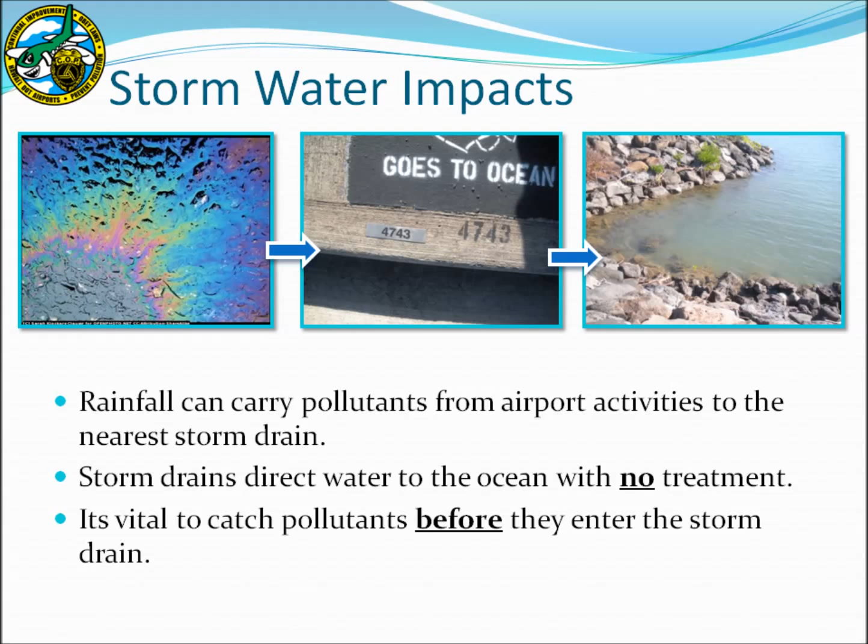All drainage systems eventually discharge to the ocean without any treatment. Therefore, it is vital to control potential pollutants before they enter the storm drain system and end up in our streams and oceans.

These structural BMPs are a requirement of the airport post-construction program, and more information may be obtained from the Hawaii Stormwater Management Program Plan, or SWMPP, Section D.

The second type of BMPs are operational or procedural practices. These are actions that may be implemented to reduce the potential for pollutants to impact the stormwater runoff. Examples of these BMPs include picking up trash, storing products indoors, or inspecting vehicles for leaks. These operational BMPs will be the focus of today's training.

There are many different BMPs that have been developed by the Environmental Protection Agency and other agencies. Therefore, each facility should implement BMPs that are specific to their particular activities.

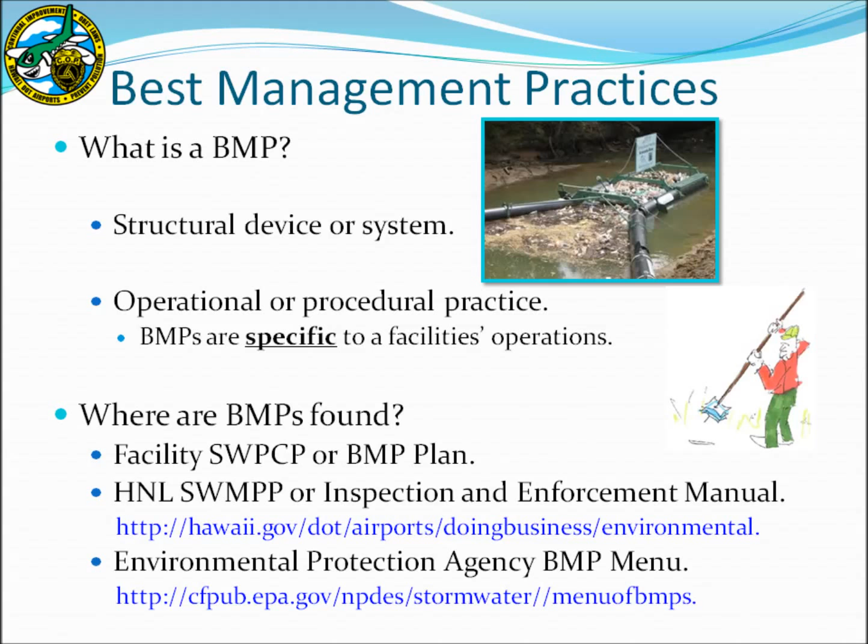At the Honolulu International Airport, tenants have been provided with specific BMPs in their Stormwater Pollution Control Plans, or SWPCP, or BMP plans. Lihue, Kahului, and Molokai airports have been provided with an airport-wide SWPCP, which is available at the website listed. For all airports, DOTA Environmental Health Specialists will evaluate facilities based on BMPs found in the Inspection and Enforcement Manual.

The first thing to do when selecting BMPs is to consider activities at your facility that may affect the stormwater runoff. The BMPs applicable to airport activities generally fall into the categories listed. Examples of both satisfactory and unsatisfactory BMPs are provided on the subsequent slides.

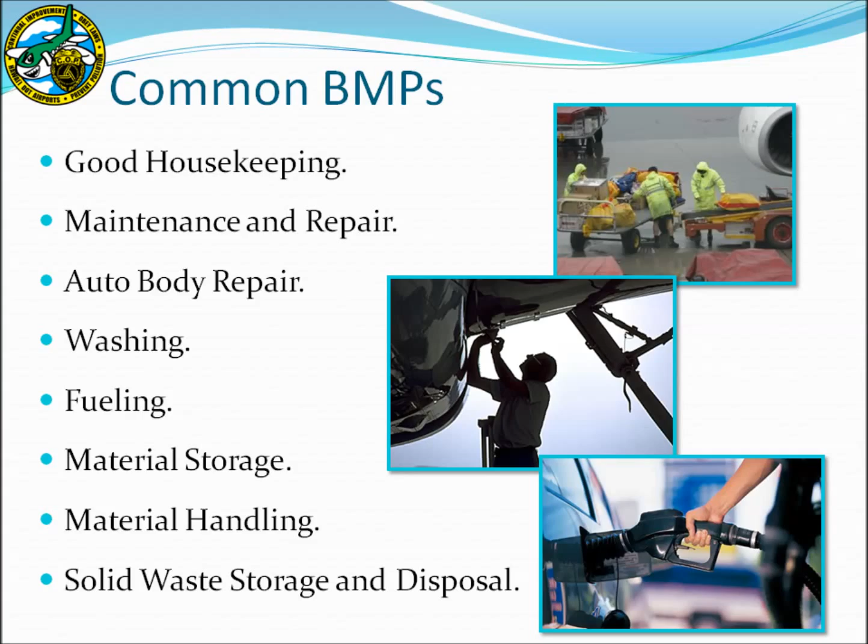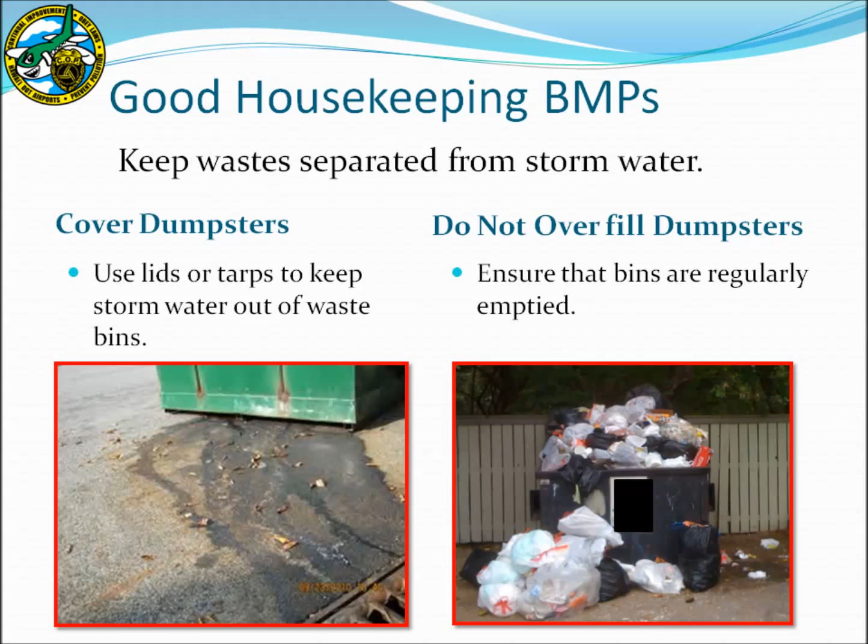The applicable BMP that should have been implemented is to store waste away from storm drains and to keep waste bins covered. The photo on the right shows a bin that has been overfilled, which has prevented the bin cover from closing. Trash and other debris left outside of the bin and uncovered may impact the stormwater runoff. The applicable BMP would be to ensure that waste bins are regularly emptied and prevent dumpsters from being overfilled.

Ensure that you are aware of the location of storm drain inlets or waterways near your facility so that they can be protected from facility activities. Those areas should also be included in regular facility cleanups.

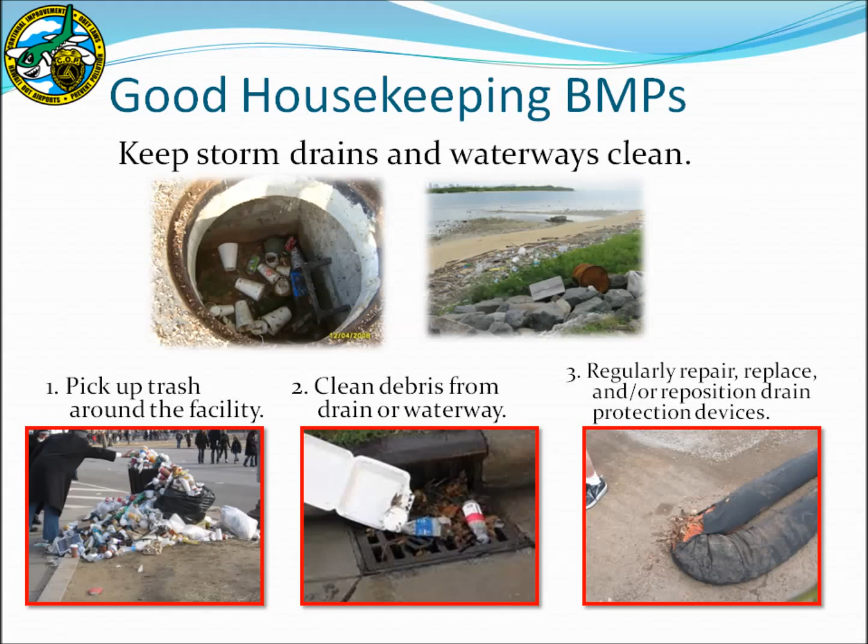Additionally, if storm drains are particularly close to facility operations, such as maintenance areas, you may consider installing a treatment device BMP, such as the berm pictured under item number 3. However, if these devices are utilized, ensure that they are properly maintained. BMPs that are not maintained can themselves become pollutants in the stormwater runoff.

As a part of the regular facility cleanup mentioned in the last slide, sediment and other debris should be removed using a broom or a vacuum. The fine sediment especially can be easily carried away in the stormwater and present a hazard to Hawaii's coral reefs. Ensure that a water hose is not used when cleaning a facility, as washwaters may also impact the receiving waters.

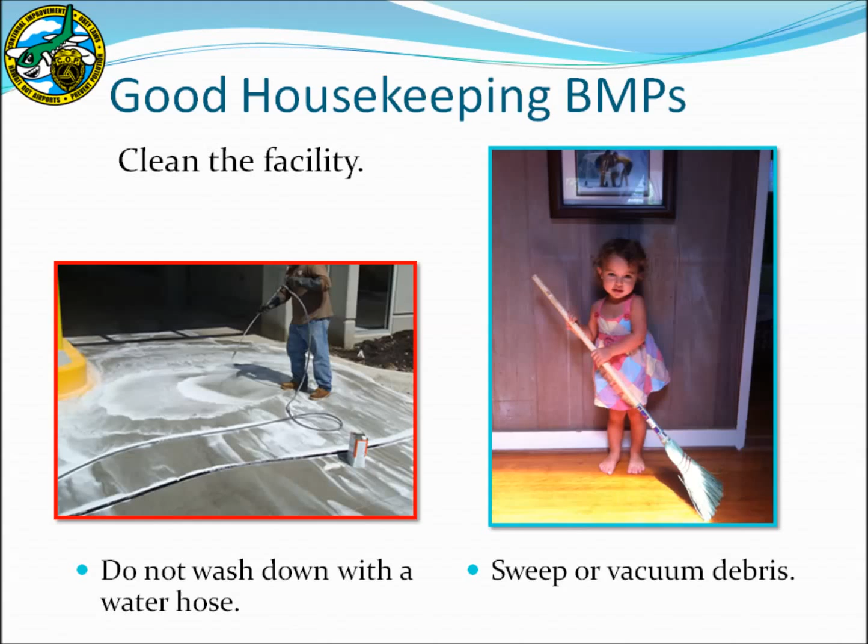Good housekeeping BMPs are varied depending on facility activities, so be proactive and consider how you can protect the stormwater. Consider using drain covers or other protective devices during activities. Contact DOTA if you notice that storm drains are filling with debris for cleaning.

Ensure that your workers are knowledgeable of facility BMPs. They will be asked during inspections whether they have had training and which BMPs they are responsible for implementing. Also, conduct your own inspections of BMPs to ensure that they are effective before an illicit discharge occurs.

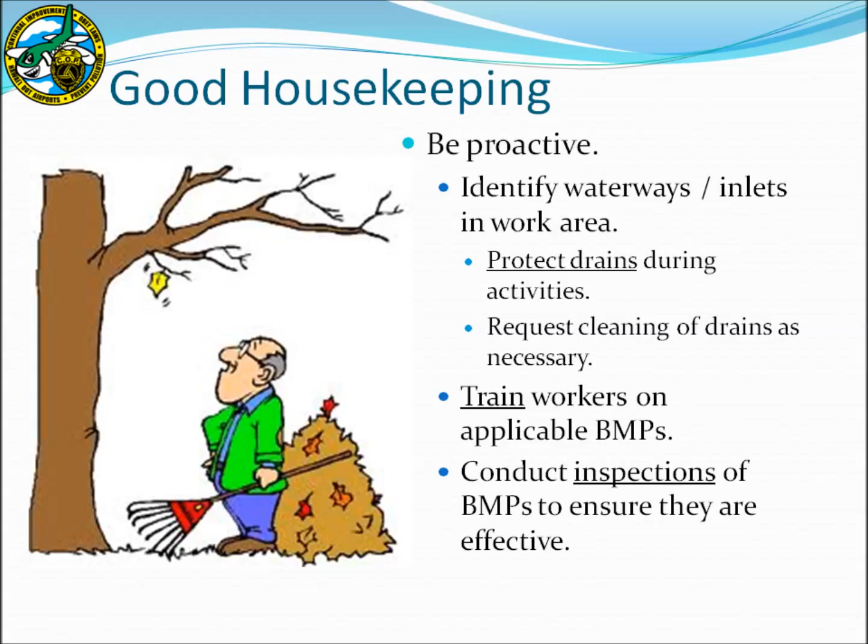The next category of BMPs are for vehicle, equipment, and aircraft washing. Washing activities should be conducted in a designated wash rack area if one is available. Wash racks are typically designed to contain the wash water and direct it towards an oil-water separator where it is treated prior to discharge in the sanitary sewer.

When washing, attempt to use as little water as possible to accomplish the task and ensure that it is contained within the system. Any wash water that is not contained in the wash rack may be discharged into the storm drain system. Often, discharges occur when wet vehicles and equipment leave the contained washing area.

Allow the equipment to dry as much as possible in the wash rack prior to exiting, and locate wash racks away from the storm drains to prevent these discharges. Also, consider the detergent being used, as some may not be compatible with the oil-water separator.

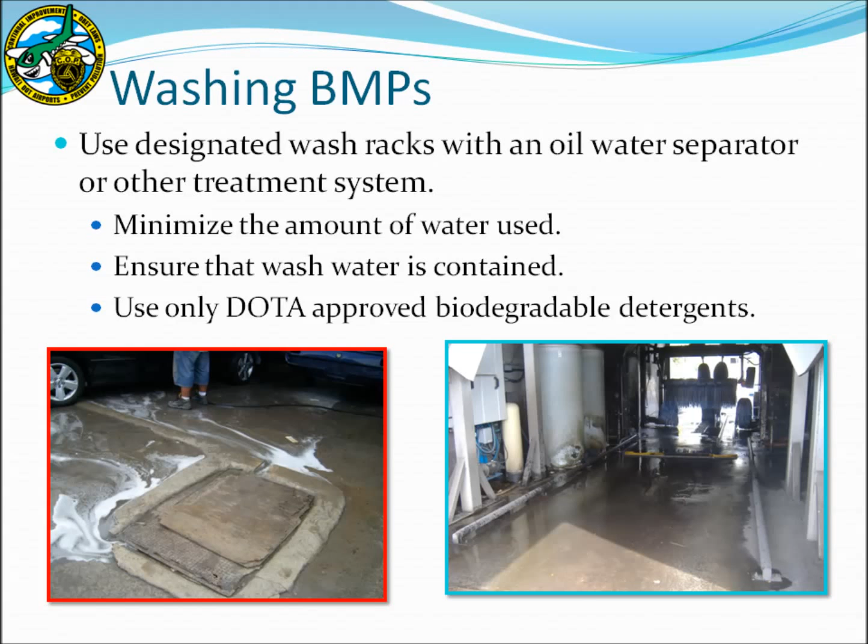In areas where a designated wash rack is not available, there are several alternative BMPs that can be applied. The goal of these alternative BMPs is to prevent the wash water with its potential pollutants of soap, dirt, metals, and oils from entering the storm drain system. This can be effectively achieved by containing the wash water.

Dry washing using a chemical and a rag to wipe down equipment is another BMP to consider when washing is required. This method does not involve water, and therefore there is no risk of discharge to the storm drain system.

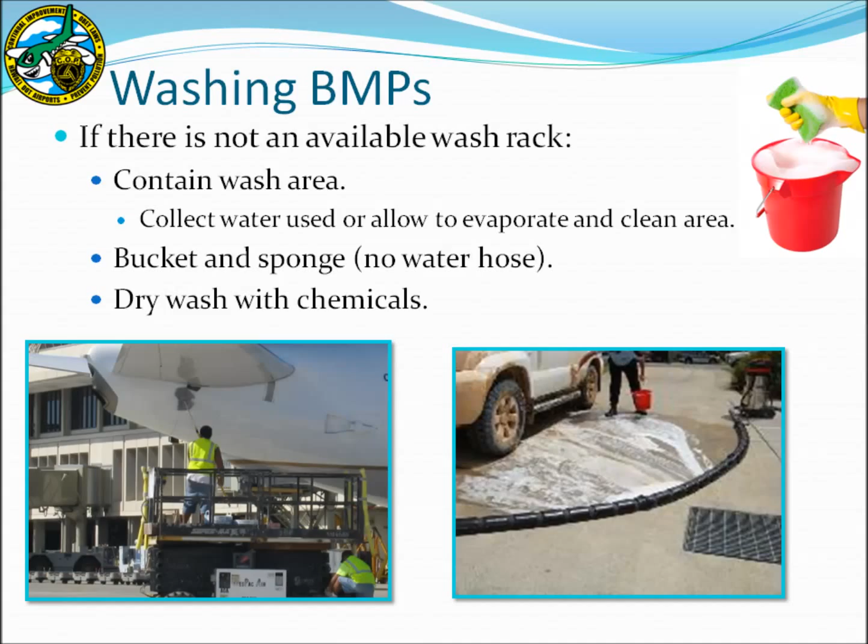Fueling BMPs consider regulations from the NPDES program as well as the Spill Prevention Control and Countermeasure, or SPCC program. For both programs, the airport's inspectors will be looking to ensure that adequate secondary containment has been provided for the fuel tank. The secondary containment may consist of a double-walled tank, a bermed area, or a polyethylene container. The containment must be sized to hold the contents of the largest tank, plus freeboard for rain if stored outdoors.

Operational BMPs that should be implemented include inspecting hoses and nozzles prior to use for any cracks where a release may occur, staying vigilant during filling operations so that any releases are readily identified and corrected, and ensuring that the tank is not topped off. Space should be left in the tank. When filling small or handheld equipment, ensure that secondary containment is provided for the operation.

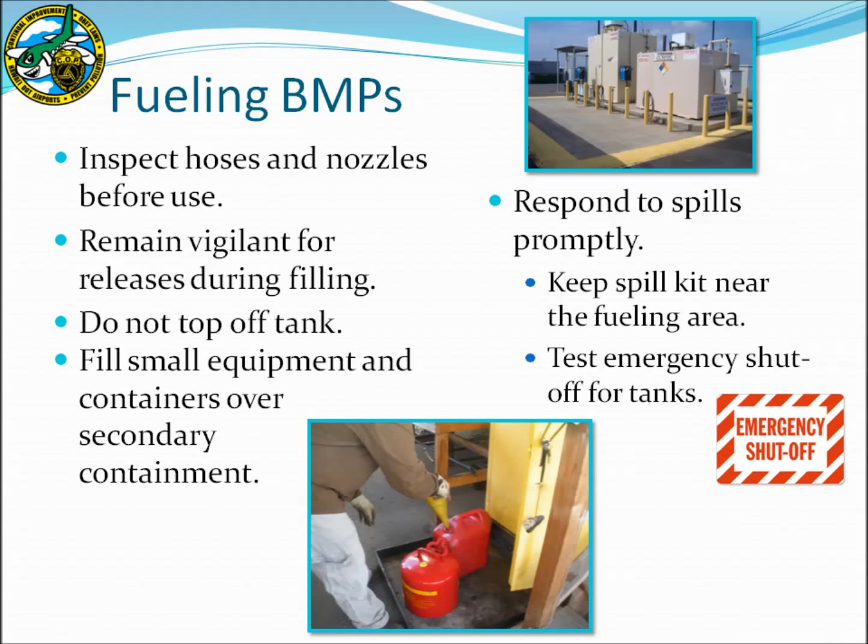Fuel trucks are regularly used at the airport for fueling aircraft. These trucks must have a spill kit on board, and personnel must be well versed in responding to spills that may occur from these activities. When not in use, these fuel trucks must be stored in secondary containment. The drive-in containment system pictured here is most often used to satisfy the secondary containment requirement.

This category of BMPs is specifically for auto body shops. There are many potential contaminants associated with auto body work, and therefore the first BMP is to ensure that these activities are conducted indoors or under cover so that these potential pollutants are not impacting stormwater runoff. This is the same reason that painting operations must be done inside a paint booth where potential pollutant discharges are contained. Often, vehicles that require auto body work may be damaged. Therefore, it is vital to inspect the vehicle and place drip pans to capture leaks until repairs are completed.

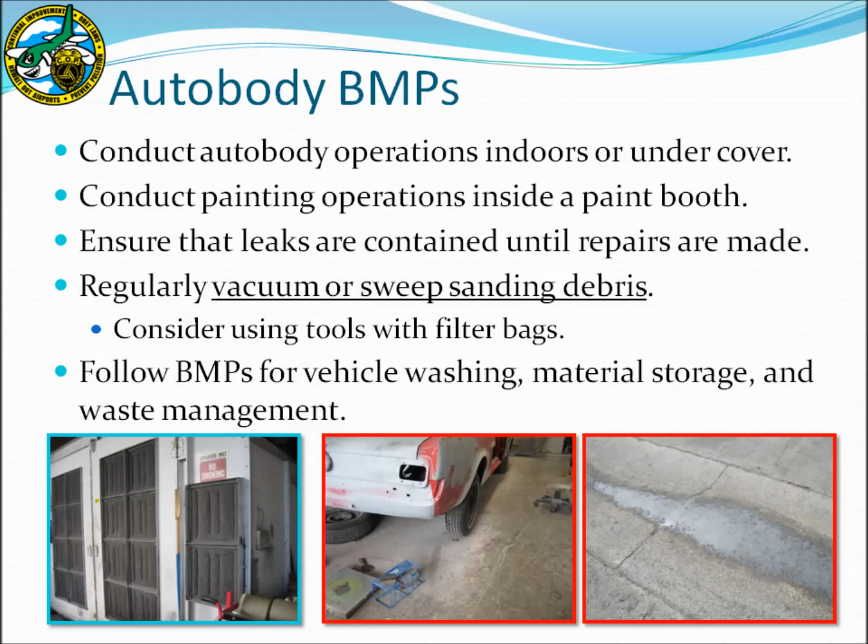A particular threat to stormwater from auto body work is the generation of dust from sanding operations. Due to its small size, the sanding dust is easily carried away during the next storm event. As noted in the pictures on the right, sanding debris can be tracked outdoors and end up in drainage ways that eventually lead to the ocean. Therefore, it is important that auto body shops regularly sweep and vacuum up the sanding dust. An additional BMP to consider is the implementation of tools that have filter bags to capture a larger portion of the dust before it is discharged. Auto body shops may also conduct vehicle washing, material storage, and waste management activities, which should adhere to the BMPs that are described in this presentation and/or their BMP plan.

These BMPs apply to the maintenance and repair of aircraft, vehicles, and equipment. It is important to keep equipment in good condition so that equipment fluids are not released to the environment. Conduct regular equipment inspections for leaks and repair as necessary. If a leak cannot be repaired immediately, use a drip pan of sufficient capacity to contain the leaking fluid. It is also important to ensure that the drip pan is regularly cleaned out. Please note that leaking aircraft, vehicles, and equipment are not allowed to be parked overnight on airport common use areas without appropriate drainage controls and prior approval from the airport's district manager.

Consider designating parking spots for vehicles at your facility so that oil stains on the ground are more easily linked to a particular vehicle. Additionally, ensure that maintenance records are kept so that patterns can be identified and equipment that regularly has releases can be decommissioned or replaced.

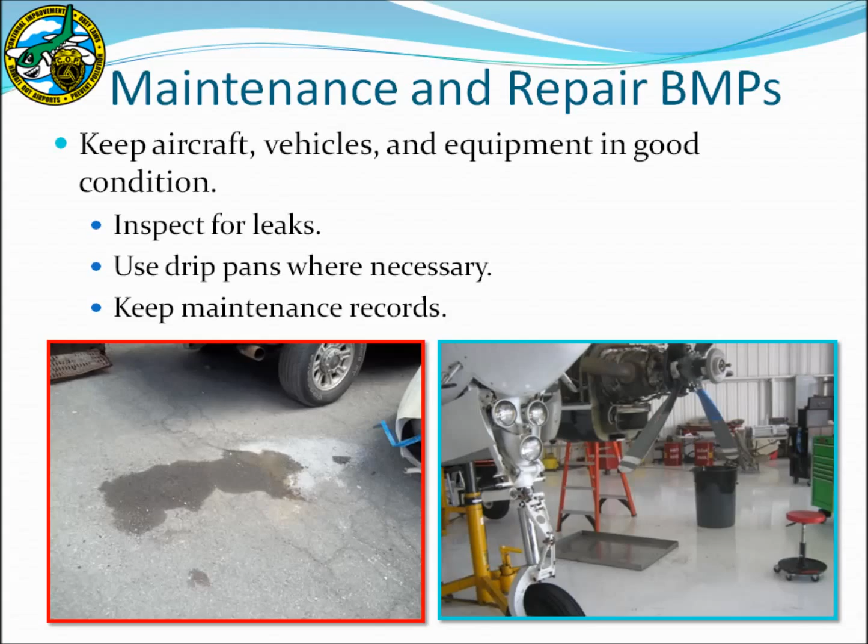Salvage equipment includes those items that are no longer working and are not planned to be repaired. When storing salvage equipment, ensure that proper BMPs are implemented. This includes removing fluids and batteries so that releases will not occur to the environment. Additionally, if vehicles or equipment begin to rust, they must be disposed of or placed in a covered area where the rust will not impact the stormwater runoff.

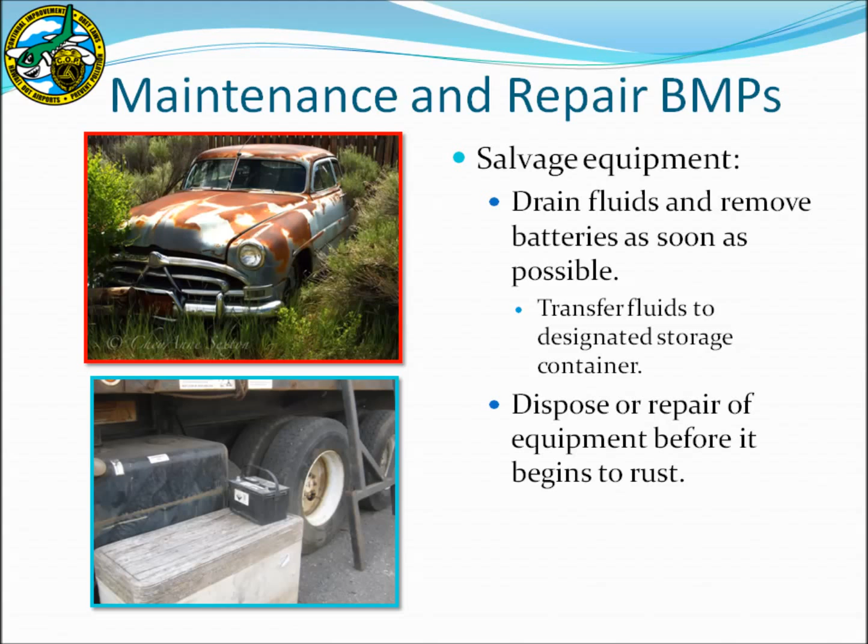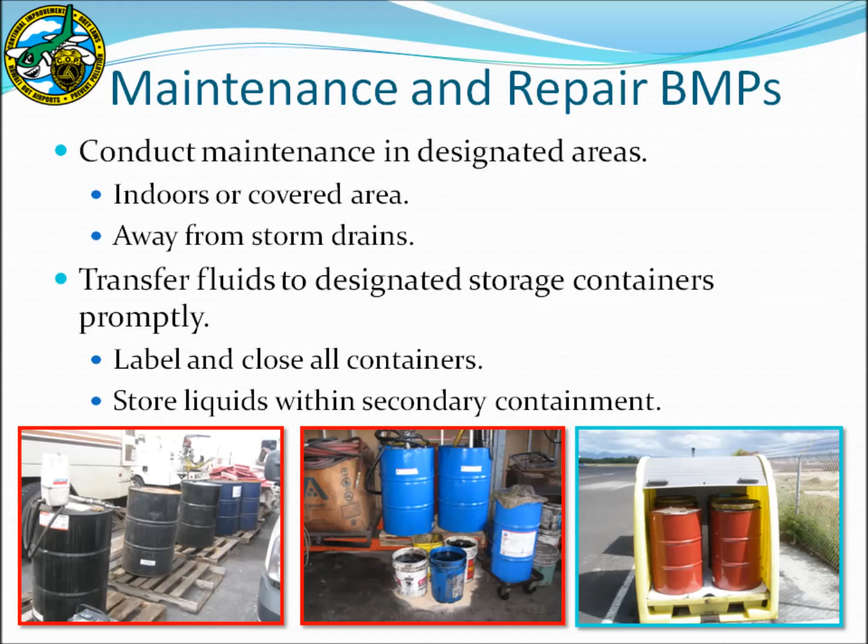Maintenance activities should be conducted indoors or under covered areas. Additionally, maintenance areas should be located away from storm drains so that responders have the opportunity to clean spills prior to reaching the drainage system. Also ensure that fluids removed from equipment are transferred to designated storage containers promptly. The storage containers must be labeled, closed, and placed within secondary containment.

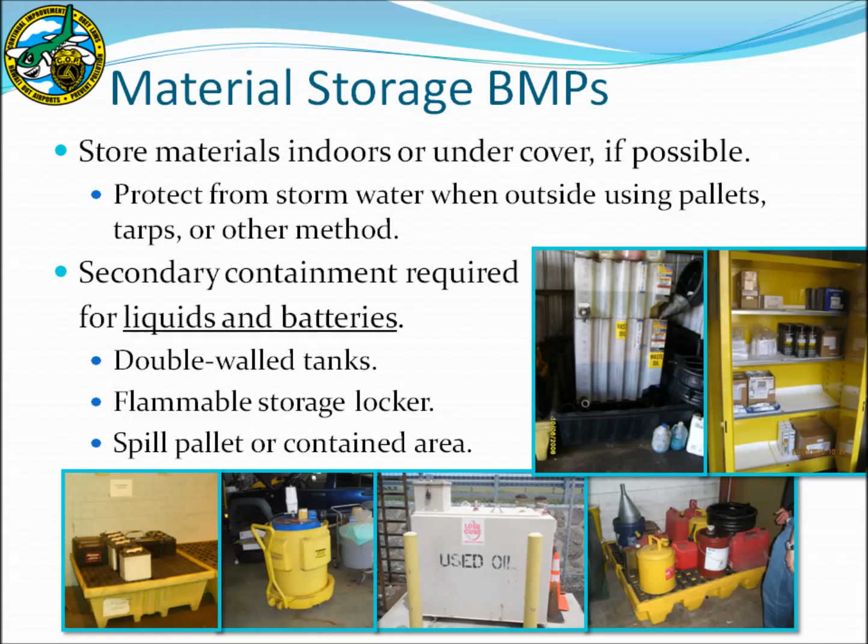The secondary containment must be large enough to hold all the contents of the largest container stored, as well as additional room for rainwater. Ensure that secondary containment is kept free of accumulated rainwater or product. Once the secondary containment device is filled, it can no longer contain additional releases from containers stored in that area. Rainwater may be discharged from the secondary containment provided that there are no contaminants present.

For example, if an oil drum is stored on a spill pallet outside, the stormwater in the spill pallet must not have a sheen. Then a designated person may empty the spill pallet onto the ground and record the discharge in their stormwater pollution control plan or other log.

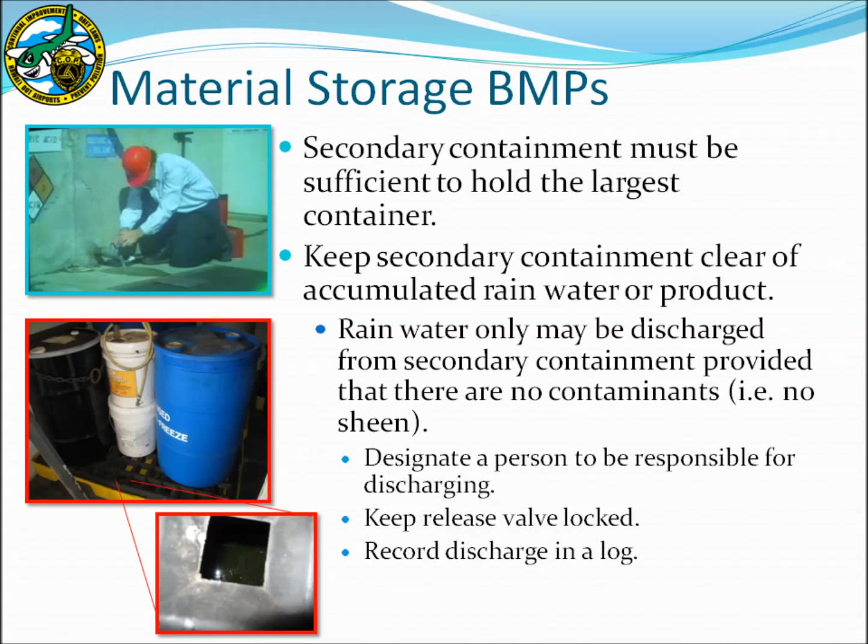For larger secondary containment that may be equipped with a discharge valve, it must be kept locked unless being utilized by the designated party. Please note that if product is present in the secondary containment, it must not be discharged. It should be cleaned according to the spill response procedures.

Other material storage BMPs include maintaining a list of chemicals at the facility along with the safety data sheets. Keeping an inventory will assist in preventing employees from over-purchasing items and also assist in ensuring that items are utilized prior to their expiration date. Both of these practices will reduce the generation of waste from material storage. Facilities should also consider alternatives for hazardous chemicals such as biodegradable solvents. Thus, if a release does occur to the environment, it will not cause such a significant impact.

It is also vital to conduct regular inspection of material storage areas. Ensure that containers are compatible with the materials stored and that they are still in good condition. Additionally, all chemical containers must be labeled. Even if the container is empty, then it must be labeled empty.

Aggregate material may also be stored at the facility, such as stockpiles of gravel or dirt. These aggregate materials may be carried away in the stormwater runoff, and therefore, appropriate BMPs include containing the stockpiles. There are many different types of containment, such as concrete walls, jersey barriers, silt fences, berms, or tarps.

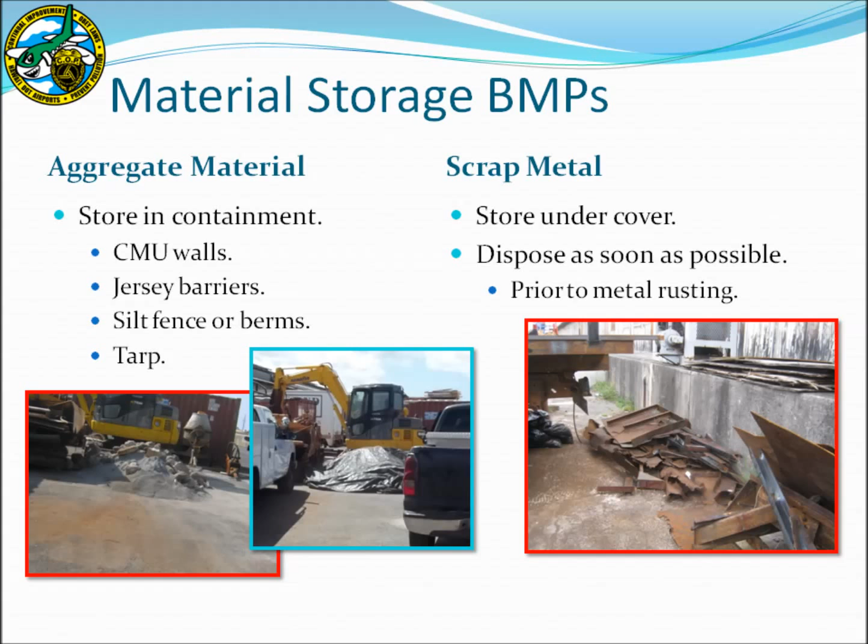Pesticides can include herbicides, such as Roundup, that are used to control weeds in the facility, as well as insecticides, such as Raid. These products are harmful if discharged to the storm drainage system, since they will also work to kill aquatic life. Therefore, applicable BMPs include storing pesticides and application equipment in secondary containment.

Also, applicators should check the weather conditions and ensure that pesticides are not used during high winds or prior to a rain event. When the pesticides are used, a log should be retained that includes the date of the application, the location where it was used, and the amount of pesticide that was applied. This log should be provided to the DOTA Environmental Section for their reporting requirements.

Additionally, the Department of Health has issued new regulations under HAR 11-55 regarding the use of pesticides. In general, these regulations will apply only if pesticides are used in or near a water body. Therefore, the DOTA has issued the rule that pesticides are not to be used within 6 feet of a water body. Please consult the DOTA Environmental Section with questions regarding this directive.

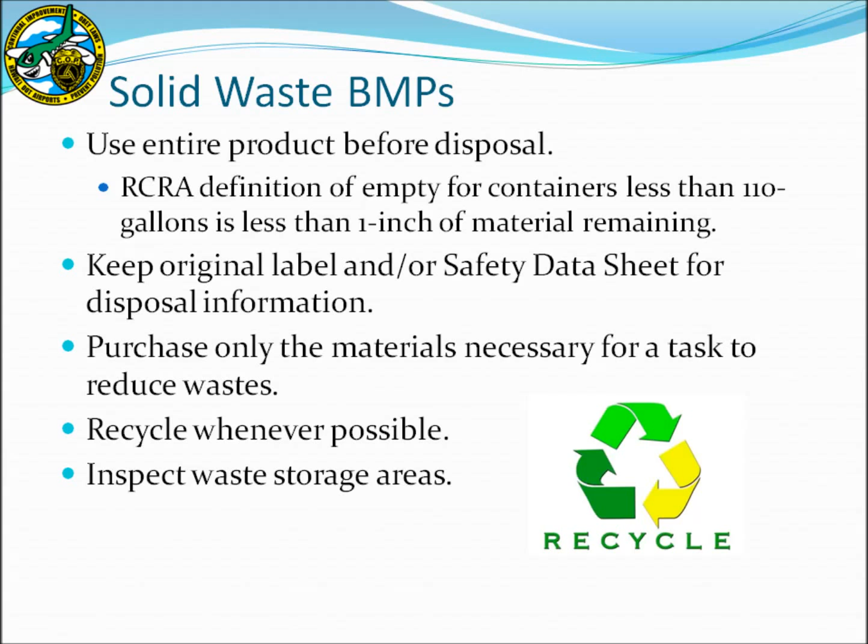Recycle items whenever it is possible, such as scrap metal and batteries. It is vital to inspect waste storage areas to look for releases and to ensure that waste containers are in good condition, closed, and properly labeled.

Many maintenance activities at the airport generate used oil. BMPs for used oil include storing it within a secondary containment device that is indoors or under cover. The used oil container should be structurally sound and properly labeled by removing all other markings and adding the words "used oil." Additionally, the container should be closed when not in use, such that if it were to tip over, the waste would not be spilled.

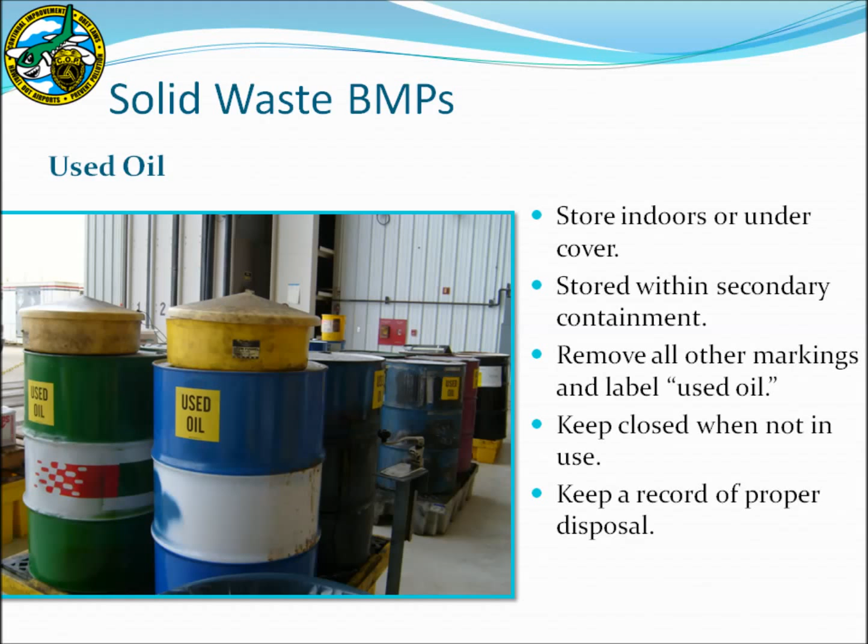When disposing of the used oil, ensure that a record of the disposal is retained. Airport inspectors may ask to view these records to ensure that wastes are managed appropriately.

Hazardous wastes are another waste category that is heavily regulated. You must first determine if the wastes generated at your facility are hazardous. Please refer to 40 CFR 261 for the definition of hazardous waste. If hazardous wastes are stored at your facility, ensure that the wastes are not mixed.

BMPs for storing hazardous waste include keeping them indoors or under cover, ensuring that they are within secondary containment if liquid, and labeling them properly with the words "hazardous waste" and the accumulation start date. Ensure that wastes are disposed within the appropriate timeframes depending on the facility generator size, and maintain the disposal manifest for 3 years. Airport inspectors may ask to see copies of these manifests to verify proper waste disposal.

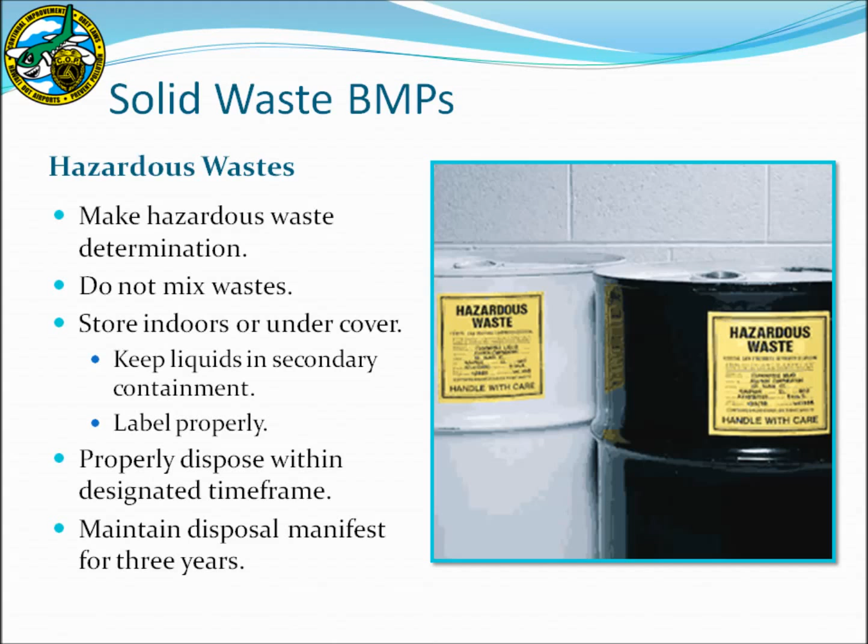Universal waste includes hazardous waste items such as lamps, batteries, bulk pesticides, and any mercury-containing equipment. If universal waste is stored at your facility, it must be placed in a structurally sound container and labeled with the words "universal waste" and the accumulation start date. These items must be recycled within 1 year and disposal documentation retained for airport inspectors. Please note that broken lamps must be handled as hazardous waste.

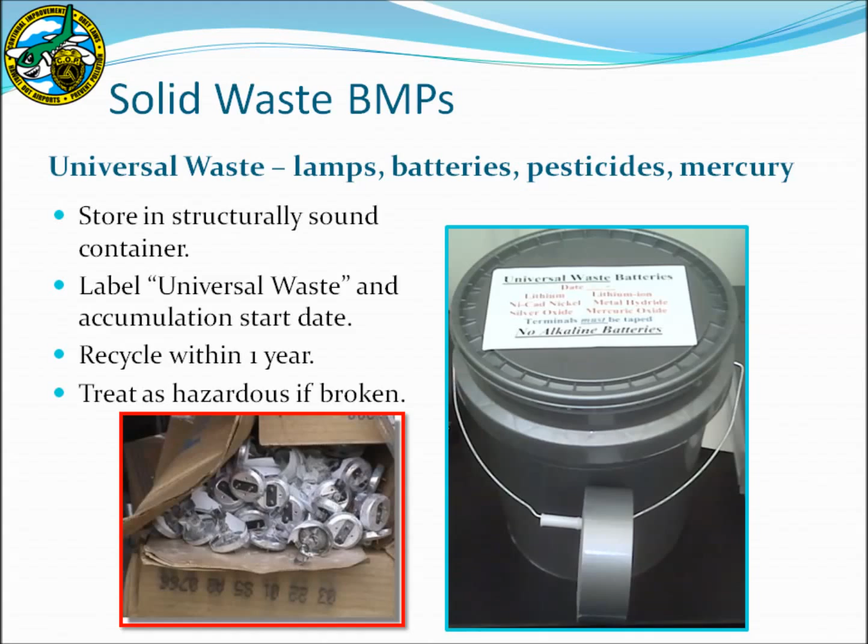Many facilities are equipped with oil-water separators, and they must be cleaned at least annually. The accumulated grease and debris must be removed to ensure that the device will remain effective at treating wastewater. These maintenance events must be logged and may be reviewed by airport inspectors.

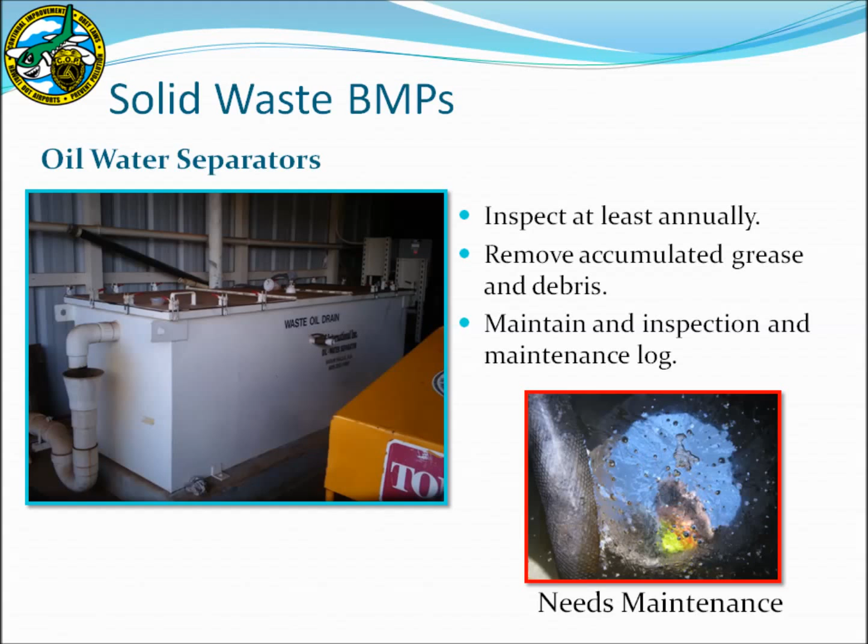Facilities that engage in the servicing of aircraft may also need to implement triturator usage BMPs. Please note that there is a separate triturator training that must be provided to lavatory waste operators. Contact the airport environmental health specialist for a copy of this required training. In general, when handling lavatory waste, operators should ensure that hose connections are not leaking and be present during the offloading process to respond to any releases that may occur.

Once at the triturator, lavatory vehicles should ensure that the vehicle is properly aligned over the triturator pit prior to discharging the waste. While at the triturator, operators are not permitted to wash the exterior of the truck. The triturators are not designed to contain this wash water, and it may run off into the storm drain system. For proper vehicle washing techniques, please refer to the previously mentioned washing BMPs.

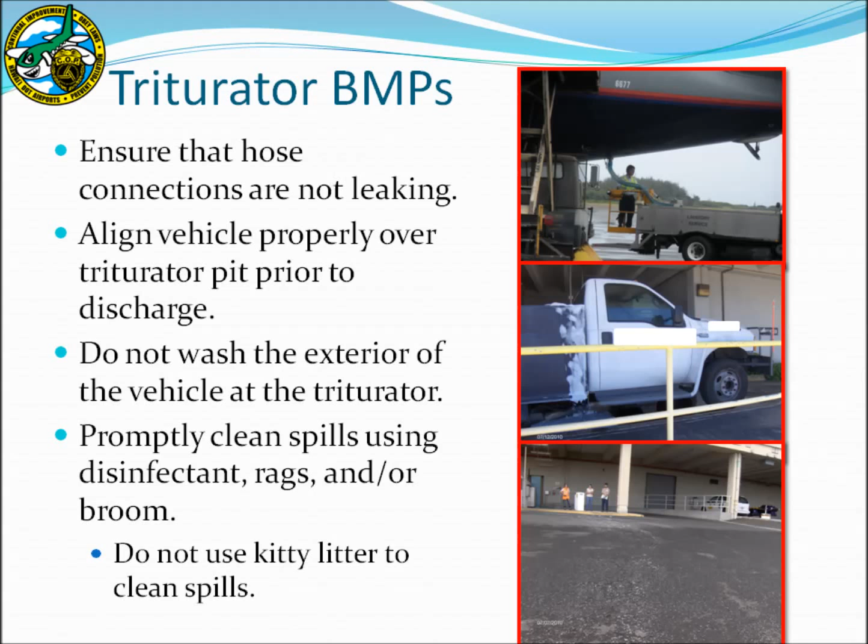If a spill does occur while at the triturator, ensure that it is cleaned promptly. Spills may be cleaned up using a disinfectant, rags, and/or a broom. Please ensure that kitty litter is not used to clean lavatory waste spills, as it may damage the triturator system.

Spills are a common way that pollutants are discharged from a facility to the storm drain system. Employees at your facility should be particularly well versed in preventing and responding to spills that may occur and protecting the storm drain system. Consider running a practice scenario or drill to ensure that employees are competent in spill response.

Additionally, every facility must have a spill kit. The spill kit should contain personal protective equipment, or PPE, for employees to wear while cleaning the spill, such as gloves and goggles, a plastic bag or other container for disposal, non-sparking tools such as a broom. Consider posting emergency phone numbers for employees. Every facility should have a designated emergency coordinator who will ensure that spills are properly cleaned and make the necessary notifications.

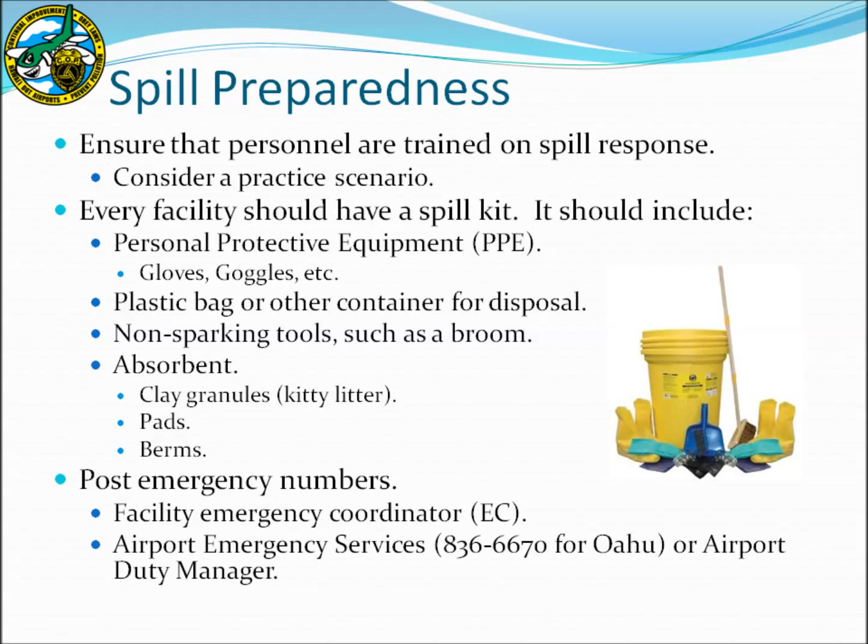When a spill first occurs at the facility, begin spill response by stopping your work and shutting down your equipment. Attempt to determine the source of the spill. If it is from a drum, you may be able to patch the drum or transfer the drum's contents to stop the flow of the spill. If the spill is coming from larger equipment, such as a fuel tank, you may be able to hit the emergency shutoff button to stop the flow of the spill. Additionally, if the spill is a petroleum product, shutting off vehicle engines will help to prevent ignition of the material.

Alert those in the immediate vicinity of the spill so that they can evacuate as needed, and also so that they will not enter the spill area and possibly track material. Then determine whether the spill is within your means to clean. If you have sufficient resources, such as trained personnel and absorbent, then begin the spill cleanup. If not, ensure that a spill response contractor is promptly notified and storm drains protected until cleanup is completed.

When cleaning spills, begin by accessing your facility spill kit and don the appropriate PPE. Contain the perimeter of the spill to limit the area affected using berms or absorbents. Also ensure that any nearby storm drains or other waterways are protected. Allow approximately 15 minutes for the absorbent to bind to the spilled product. Ensure that the absorbent is not left for an extended period of time because they may be blown in the wind or carried away during a storm event.

After the material has absorbed, sweep the area and dispose of the waste properly. For airports on Oahu, spent absorbent from petroleum spills may be double-bagged and placed in the regular trash to be burned for electricity. Neighbor islands may have to treat the spent absorbent as a hazardous waste depending on the individual landfill rules.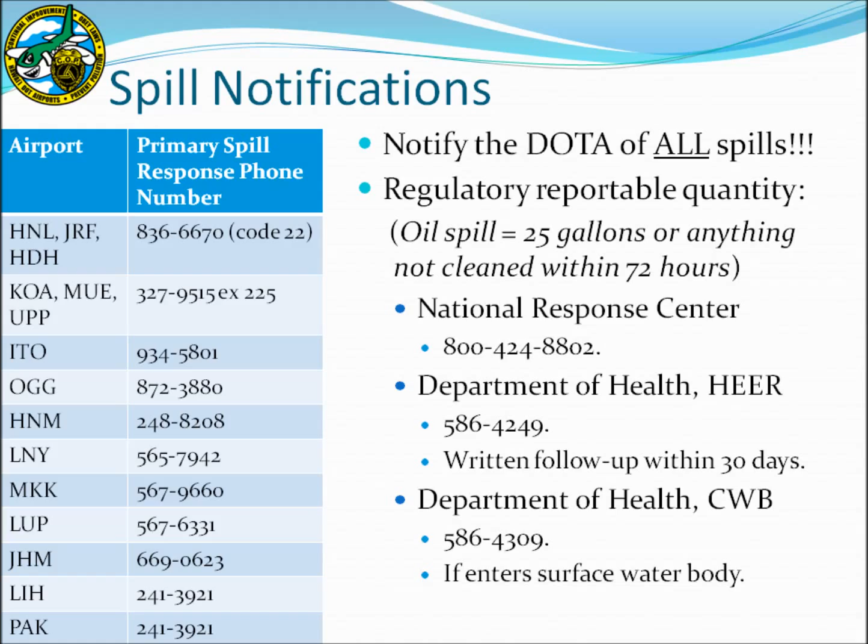Another component of the NPDES program is the identification of illicit discharges. Illicit discharges are considered anything that may be discharged to the storm drain system that is not composed entirely of stormwater. There are some exceptions listed in the NPDES permit. However, a good rule of thumb is that only rain goes in the storm drain. The respective environmental health specialists for each airport are charged with investigating the source and stopping illicit discharges. However, they need the assistance of everyone at the airport to help identify these problems.

Also, as a requirement of the airport's NPDES permit, BMPs at construction sites must be properly managed. Details of the airport's Environmental Construction Management Program may be found in SWMPP Sections C and D and in a separate training presentation available at the website listed.

If you are planning construction activities at your facility, you must comply with these procedures. In general, they include a construction plan review to ensure that BMPs are adequate for the project, that proper permits have been obtained, and that post-construction BMPs have been considered for projects over 1 acre. Specific forms are required for this plan review, and tenants should refer to SWMPP Section C prior to submittal.

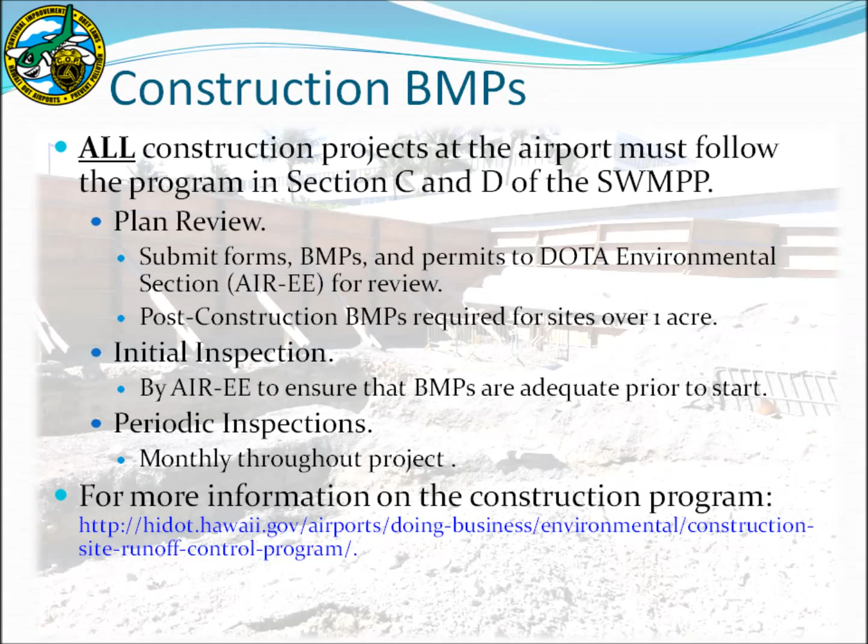Once a plan is approved, the environmental section will perform an initial inspection to ensure that the stated BMPs have been properly implemented. No other construction work may commence until the initial BMP inspection has been passed. Then, throughout the project, the environmental section will conduct inspections to ensure that compliance is achieved. When violations are noted, enforcement actions may be conducted and inspection frequency may increase. Please consult with the environmental section if construction is planned for your facility.

Several environmental regulations govern DOTA's properties and facilities and require the implementation of BMPs such as those discussed in this presentation. Specifically, the National Pollutant Discharge Elimination System, or NPDES, is a requirement of the Clean Water Act under 40 CFR 122, as well as Hawaii Administrative Rules 11-55.

The Honolulu International Airport has an individual NPDES permit for its storm drainage system. As a part of the requirement for the NPDES was the development of the SWMPP, which includes BMPs that must be implemented at the airport. Furthermore, Stormwater Pollution Control Plans, or BMP plans, were prepared for each tenant's specific site conditions, so ensure that you are familiar with those plans and BMPs.

At Lihue, Kahului, and Molokai, there is a general NPDES permit, and the DOTA has provided an airport-wide stormwater pollution control plan with BMPs specific to those particular airports. In addition, all airports are required to implement BMPs per the airport policy as well as the consent decree that was drafted between the Environmental Protection Agency and the DOT. Specific BMPs may also be found in the Tenant Inspection and Enforcement Manual available online.

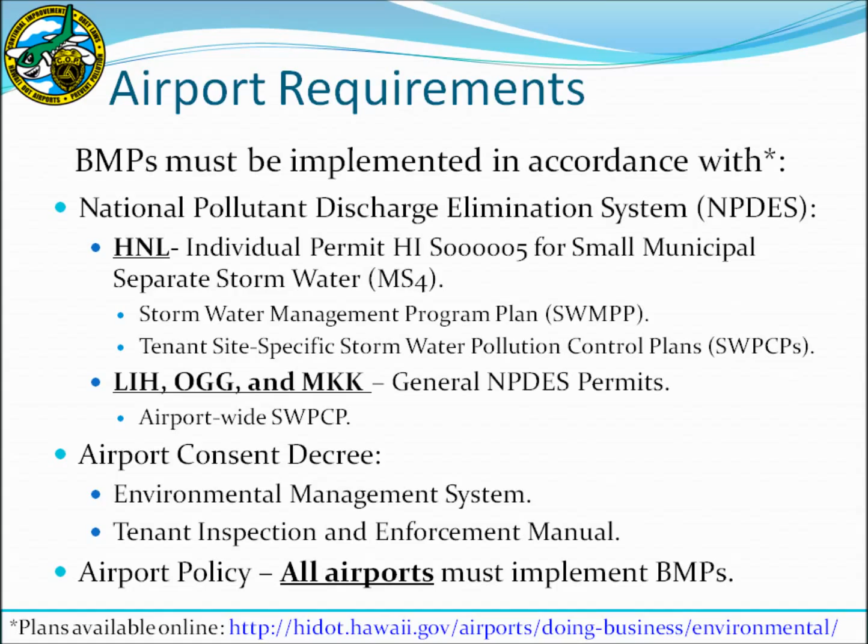Another requirement of the consent decree is the implementation of an Environmental Management System, or EMS. As a part of the EMS, everyone at the airport must be aware of the environmental policy that was signed by the Director of Transportation. The full version of the policy is available at the DOTA website. However, the acronym COP has been created in an effort to make it easy to remember.

The C stands for Continual Improvement. The O stands for Obey All Laws. The P stands for Prevent Pollution. The airport has taken the COP acronym and developed this logo and the slogan, Be a Cop. Please ensure that everyone is familiar with this policy and logo as they may be interviewed during regulatory audits or airport inspections.

The DOTA has the ability to conduct enforcement as defined in the Inspection and Enforcement Manual. In general, failure to comply with environmental regulations and airport procedures, including the implementation of BMPs, may result in enforcement. Enforcement actions will escalate beginning with a verbal warning. This may be something that the airport inspector will verbally state during their BMP inspection and then record on their inspection checklist. If the item is not corrected within the agreed upon time period, then enforcement efforts may increase.

Enforcement may escalate to an investigation report and then to a notice of apparent violation, or NAV. Once an NAV is issued, the DOTA will continue enforcement under Title 19, which could result in revoking the lease agreement and/or monetary fines. Cases may also be referred to the DOH for escalated enforcement.